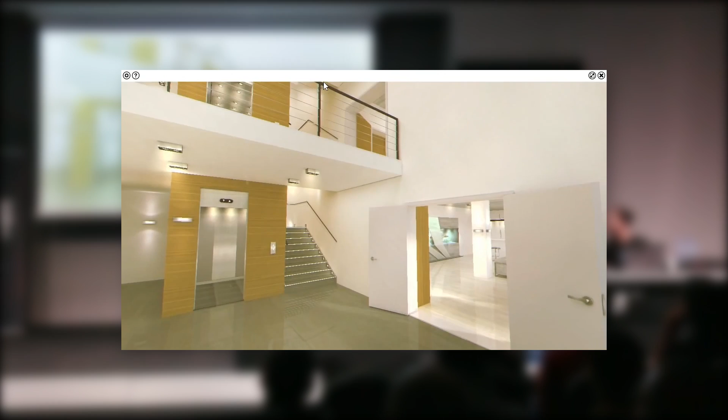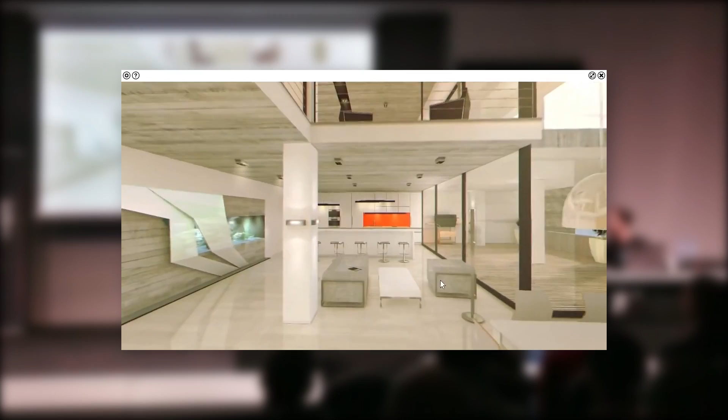That product was a very interesting thing which we very much loved. This is a gaming engine written in-house, and the fact is that the clients loved it as well.

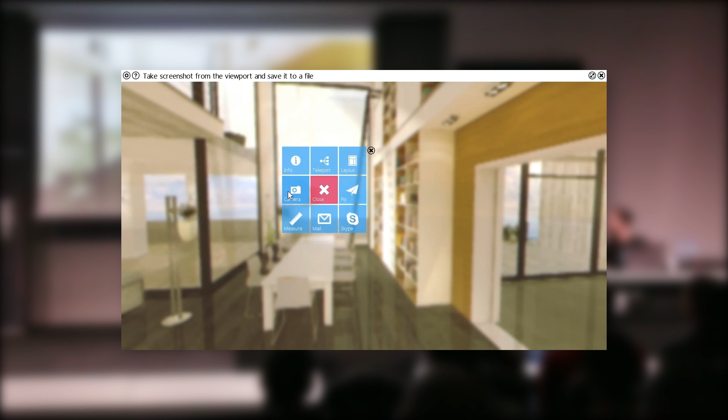But whenever they realized that they need a huge machine, that they have to use keyboard and mouse to navigate through the space, they realized it's not a selling tool. It's not a good communication tool between our clients and their clients. So for example, developers cannot sell a house with that because it's too struggling.

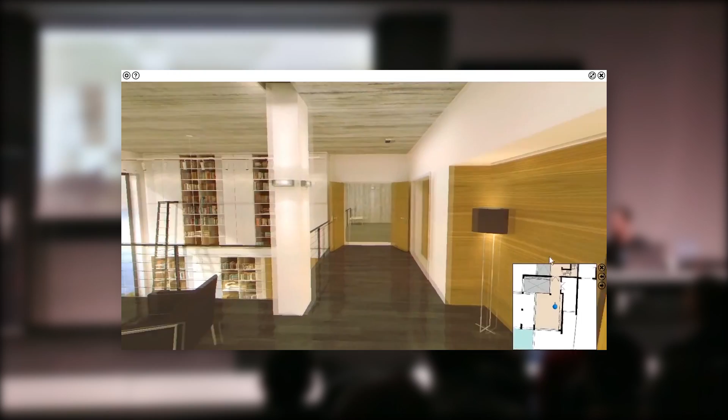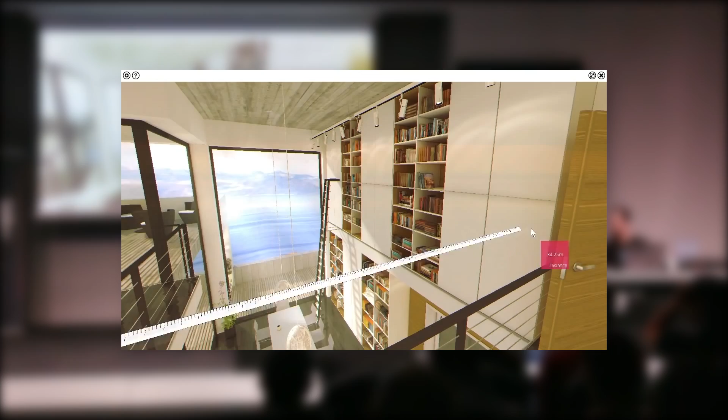So it was too early to show that product on the field, but we had the knowledge. We gathered a lot of experience - how we should handle scenes, how we deal with polygons, how we deal with baked textures, etc. In the end, that was cool stuff, but a little bit too early.

But V-Ray and VR came into the picture. And at the point when we realized we had to step forward, we dug out that experience we already had, and we made a development group and started working on tools until we had an application for VR.

But this pipeline right now leads us to a static VR. On the other hand, if you already have a gaming engine approach, you might know how struggling, how challenging it is to make something very beautiful real-time VR, because the client wants real-time VR. And this should be much more flexible than it is right now.

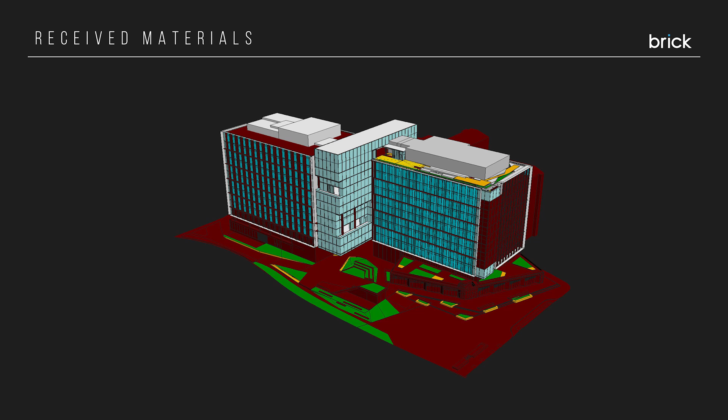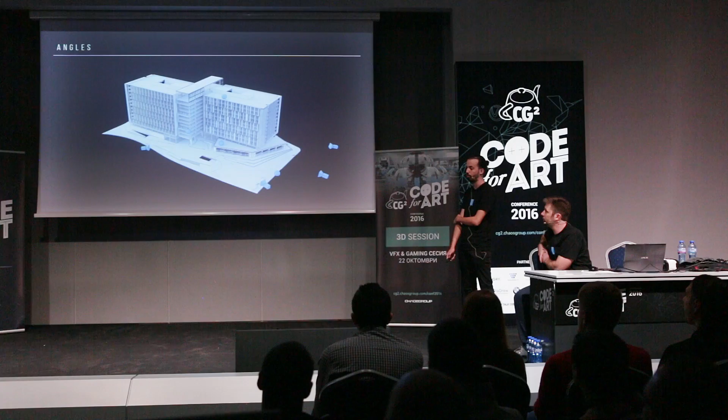So this is the Rhino model that we received, and these were the angles that they wanted. The blue spheres are the VR angles, and the little boxes are the stills. The problem came when they wanted some rooftop shots also, so we definitely had to go in and build a whole city around it.

But first, we had to discuss what the workflow should be. We thought we should do a base scene where we structure all of our environments, the hero building, and everything, and create the images from these base files. Every artist will get one image, add in whatever they want, and do whatever they want with those models. Then in the end, we will grab all of these and put them into the VR files, and then we can render them.

So we thought of it as having a background, the mid, the close, and the center of our project. I will go through shortly how we prepared these assets.

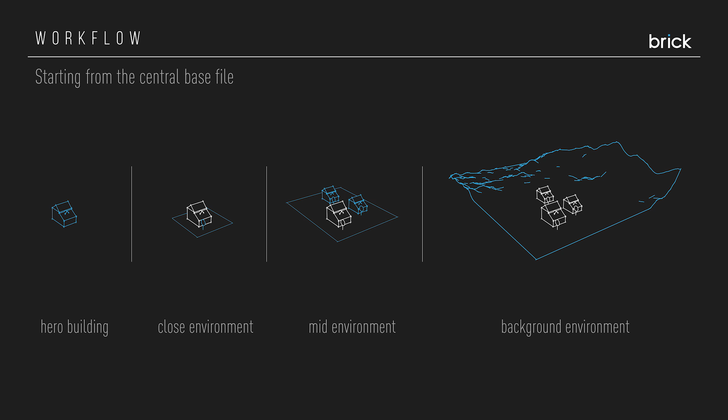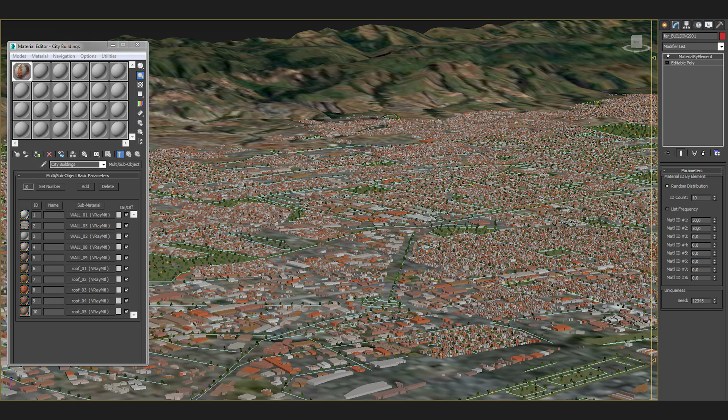So we had our far environment. This was the city we also received from the client - nothing fancy, just some boxes. But the problem was there was no terrain, so we had to hack together this environment with texture from Google. Once everything was together, we applied some random textures and scattered some forest between them. It doesn't look that good right now, but it was just enough for what we wanted.

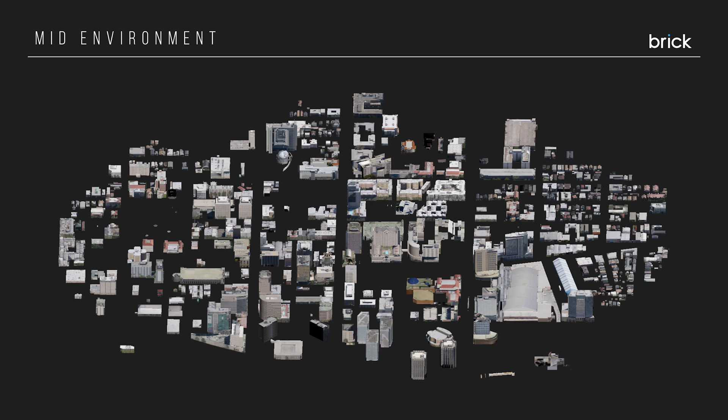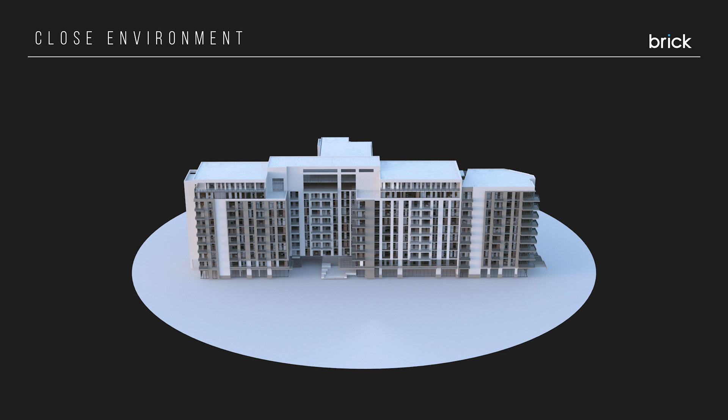If we go closer to the mid part where we need more details and better textures, we also grabbed this from Google with textures. As we went even closer, there were some buildings we had to do by hand. Also, this was the building next to our office building, and it was so close that of course we had to deal with the interiors.

So I have a short video showing how we did this part. We have this internal asset manager where we have all our assets, and it's like 2 minutes to put together this simple interior scene - really easy to find things in it.

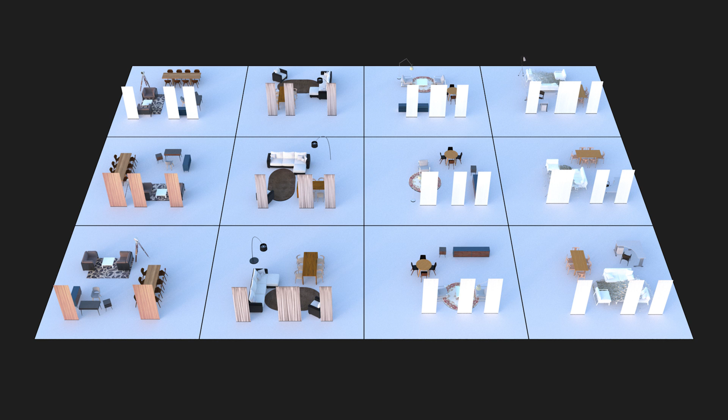Once you're done, you prepare it to be a proxy, you export it, done. We prepared about 12 of these, and we drew some splines into the interior and scattered them randomly with forest. So the end result was more or less something like this.

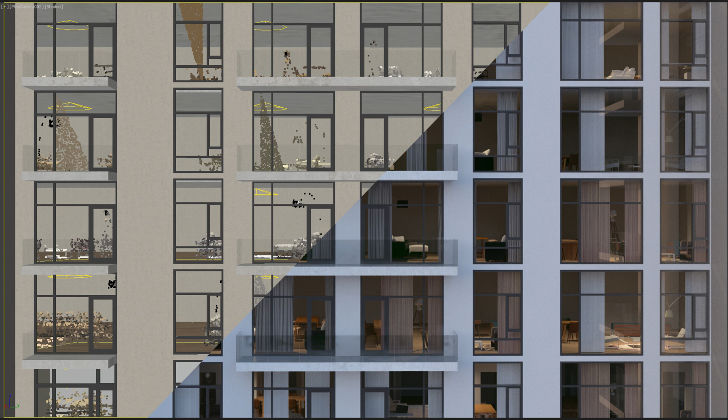Same thing with the people - we use scanned 3D people from different libraries, and we use these across for the interior and exterior parts, everything. For a bird's eye view, you don't have to precisely build up your interiors or the people around it; you just whack it into forest, and it's just enough for a shot like a bird view.

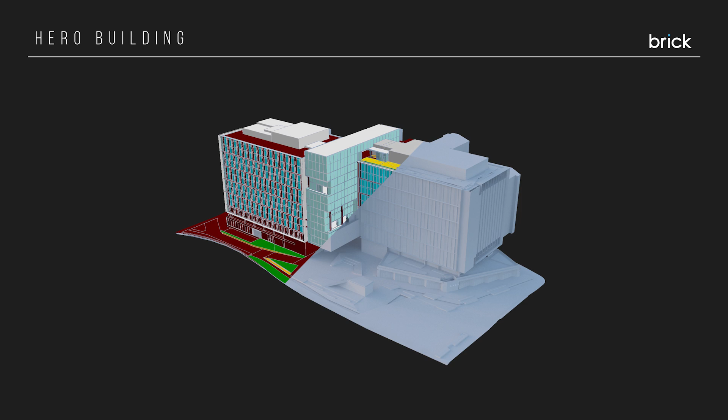Yeah, and let's prepare our hero building. Like I mentioned, this model came from Rhino, and we had to deal with all kinds of importing issues whenever we receive a file from Rhino, Revit, whatever.

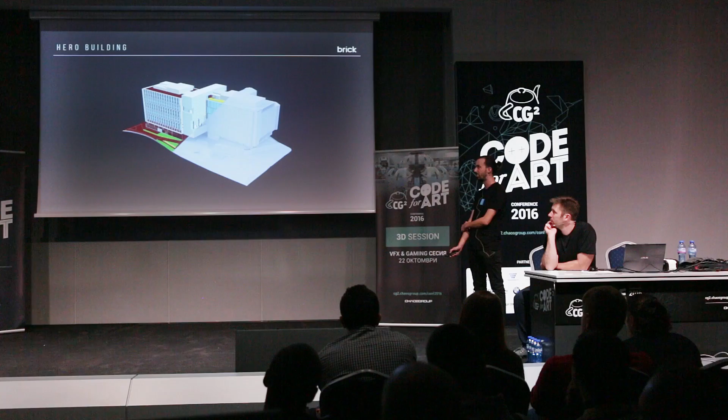The first thing is, of course, you have to export it and import it to Max. But Max is not the best software to handle tons of geometries, so it's easier if you attach it together. But the problem is attaching something is really, really slow.

So I made this funny example, attaching 1,000 teapots to show how you do it, and surprisingly it takes more than a minute to proceed. When you have a huge city to process, this could end up taking 2 hours or freezing out. So we created this little fast attach tool, and with a few tweaks it's like 5 times faster than the built-in one, which saved us a lot of time.

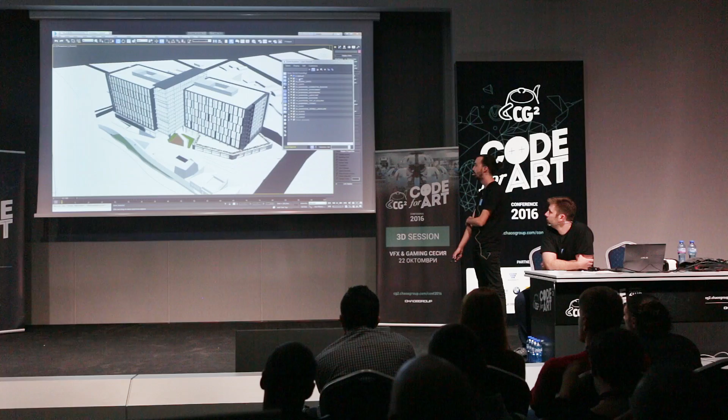So first things first, we export it and then import it to Max. This is just a really fast record that we have this complete layer structure. The goal is, once you import something, the first thing is you have to clean up everything and put it into its relevant layer. After a few hours, you will get a pretty decent asset which can go to the next phase. And the next phase is...

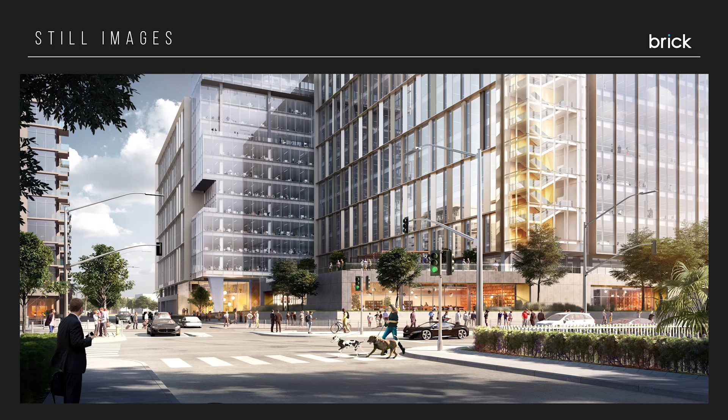Round 1, which is when we have all of our assets and should start creating the images. Images like this, which has heavy Photoshop, but a client definitely wanted to have the same look, feeling and quality in the VR renders.

So what we did is, since we have this base file and all the artists are working on different parts of the model or different parts of the image, once they're done with their part, we just shift it back to the base one to render.

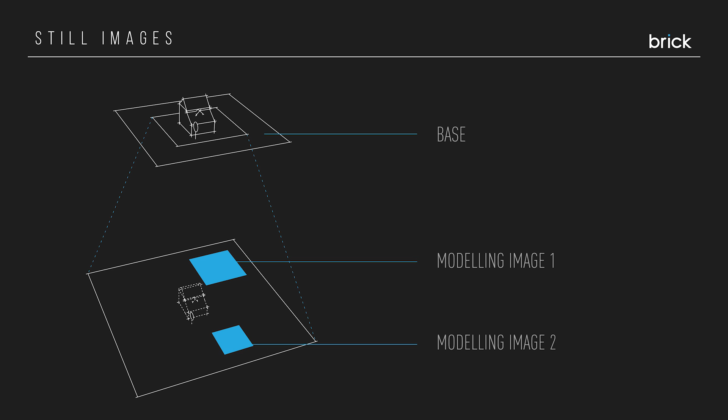Also, we have a handy tool in the office called File Transfer, which allows us, if someone is working on the same part, to split the job, and if one guy does it, he can easily share it with the colleagues. The way this works: if someone just comes to my desk and says, hey Peter, can you send over these chairs and that plant, you select your colleague's name, name the file, and press send.

Press send, yeah. And by the time he's back to his desk, he will receive that little red notification that you have something. If he refreshes it, he will see that he received something from me, and then just merge it, and he's ready to use it.

This is handy when we don't need to create temporary folders and trash our server with these unneeded things. But more importantly, of course, models are important, but what if you have the same scene and have like 5 or 6 cameras in it, or different light setups?

We use this scene manager to handle all of our cameras, and you can create different setups, add resolution to it, add a dome or a sky or HDRIs. In this example, I'm just quickly putting together these 4 views for the images.

You can browse for HDRIs, you can rotate them, set up the inverse gamma or things like that. You can also select the environment, what you want to see in the environment, and in the end, you will get this setup.

If you save your Max file, these settings will be saved also, so it's easy to pick up these different light setups. You can also set up where you want to save them as an output, and if you click render, it will go through all of the images and render them and save them with all of the elements.

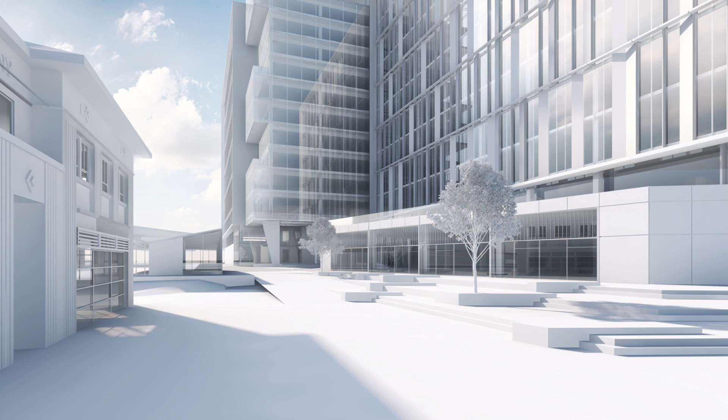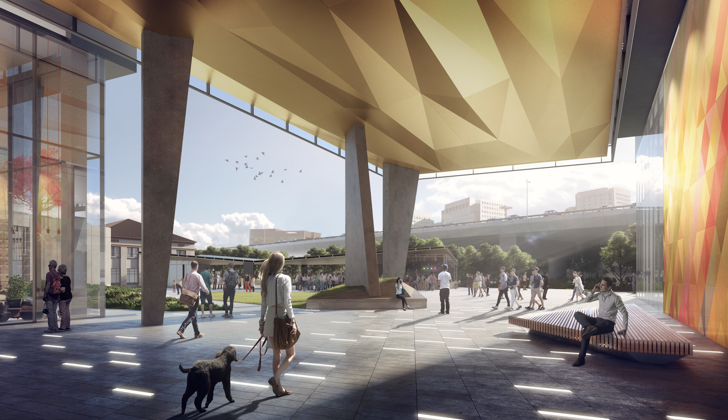So once we rendered these, this was one of the white renders that we did, and this was the final. Also another example, the white render, and the final image. So we are ready with round 1, and we can jump into the more exciting part.

All of these guys made tremendous detail in these images, and somehow we need to grab this and try to render it out. So the task was simple: just grab what they did, optimize it, put it into an XREF, tweak it for the VR angle, and then hit render.

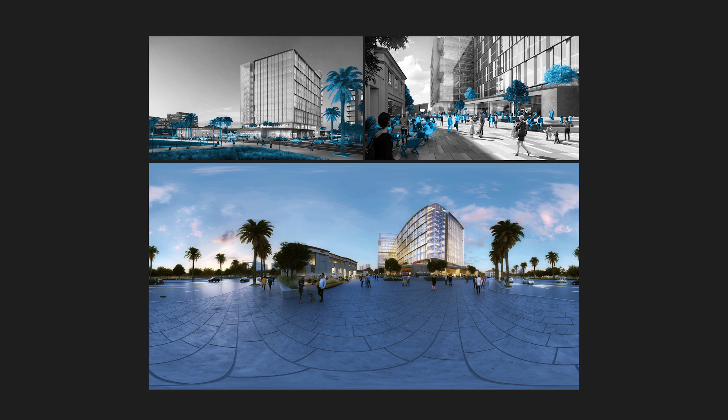In this example, you see these blue parts. These were just specifically added for these still images, but if you combine these two into a VR shot, quickly, with a day of adjusting the lights and the people around us, cars and stuff like that, you can quickly get this result.

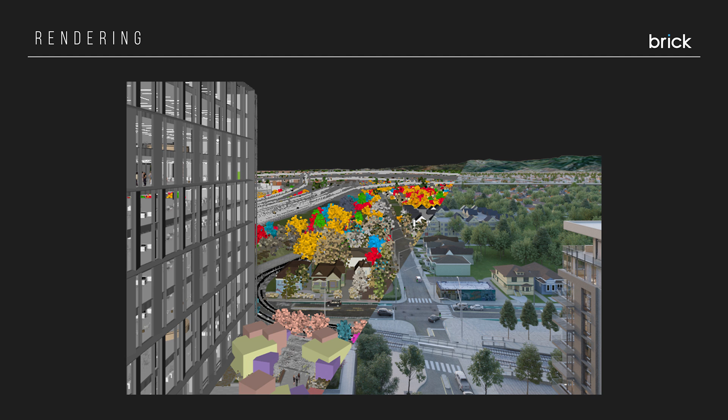And we jump into rendering. So once we have all this detail, we ran into some problems where we had too much stuff in this. In the end, all of these files were rendered with a Dual Xeon workstation with 250 gigs of RAM, because this was the only machine in the office who could open this large scene.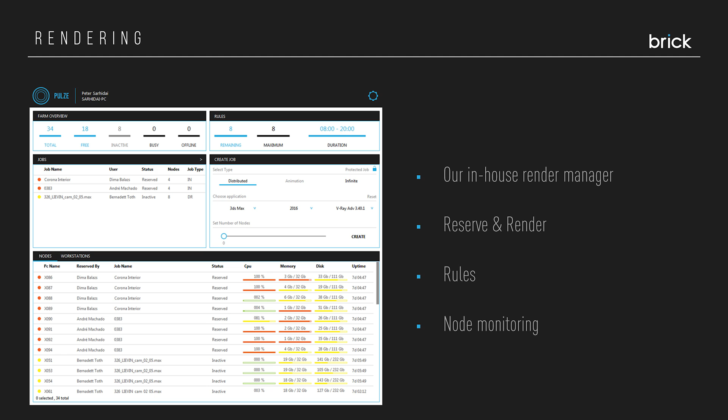And because Attila mentioned there are like 40 people working in the office with a lot of artists, and we have a lot of running jobs, after a while it was convenient to build our own render manager. Not just that we couldn't find the right solution for us, it was also fun to create this.

So what is special about it, for example, we have these rules in this upper part, and I can set up for each person or for each project that from 8 to 8 you have 8 nodes, and that's all. You cannot use more, because there are like 10 more projects who need to use the render farm. So I recorded a small video of how we use this.

So if you fire it up, it's simple. You just need to select your version of Max and render engine, which was V-Ray. You drag the slider, you press create. It creates a temporary job, and then in Max you just need to click distributed rendering, and you have all the PCs there that you selected, and you're ready to render.

And when Max starts rendering, it sends a small message to the program that it started rendering, so the guys who are sitting in the office cannot touch it. And once you're done, it's back to inactive, and then after 10 minutes it will be deleted forever.

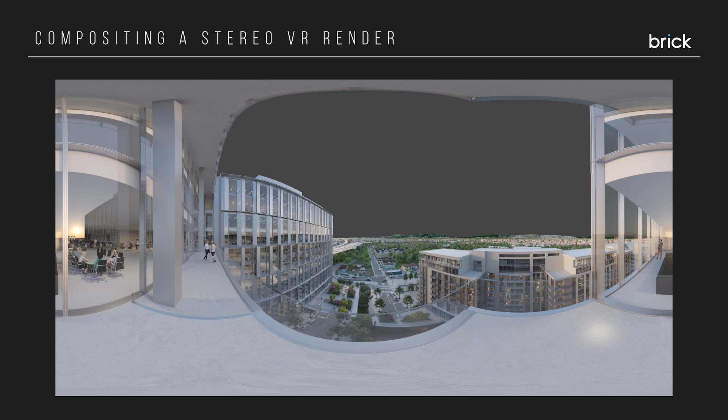So it's very important to know that we have this ArchViz pipeline. As I mentioned, we used to use Photoshop, for example, for post-production, and we are aware of the fact that there are beautiful and enormous solutions such as Nuke from Foundry, but we implemented a well-known tool for the post-production. So, if I go forward, let me summarize how it is going in After Effects.

We have this huge stripe, which is coming from V-Ray. Thanks to them. We like this format very much because it has huge pixel information, and somehow we have to deal with these 22 million pixels. If we used an equirectangular image in Photoshop, with this solution we lose pixels, and to be honest, it's hard to deal with the strange distortion of the equirectangular, hard to paint over it and play on it.

So we decided to go to After Effects, and we take one part of the stripe, one eye, and since After Effects is a three-dimensional program, we are able to make a box, this box in the middle, which is the raw render, and every adjustment which is added, the different elements, new sky, a reflection layer on the windows to make it much nicer, etc., can be handled in a similar way in After Effects in 3D.

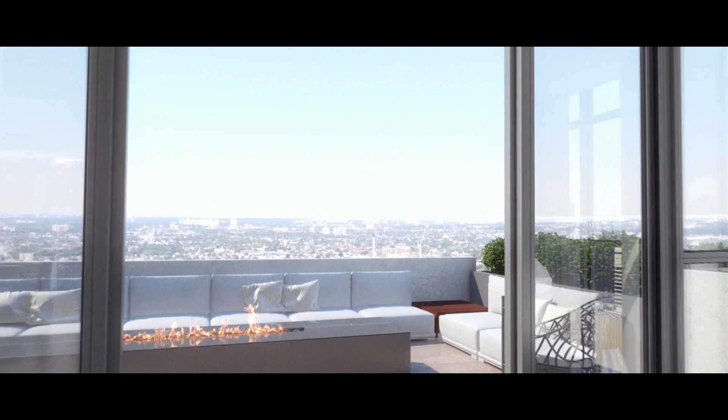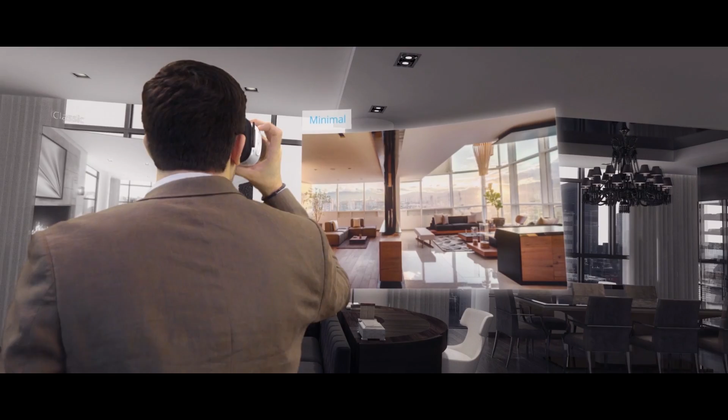We already sell this product, and the very important thing is that we gather all the information back from the client: how they use it, what their experience is, etc. And of course, we are working with sales partners as well. And one of the most common challenges with this whole VR stuff is the fact that everybody who uses VR becomes isolated from their surroundings, and it frustrates the users.

They don't like to be in the middle of a stage with everybody staring at them; it's not comfortable. On the other hand, it's also hard to communicate with the user, hard to point out, okay, you should go there or you should use that. Right now we don't force the client to use a keyboard and mouse to navigate through the space, but still this user interface can be challenging for someone. So we realized that somehow we have to step in and help the client to be happy.